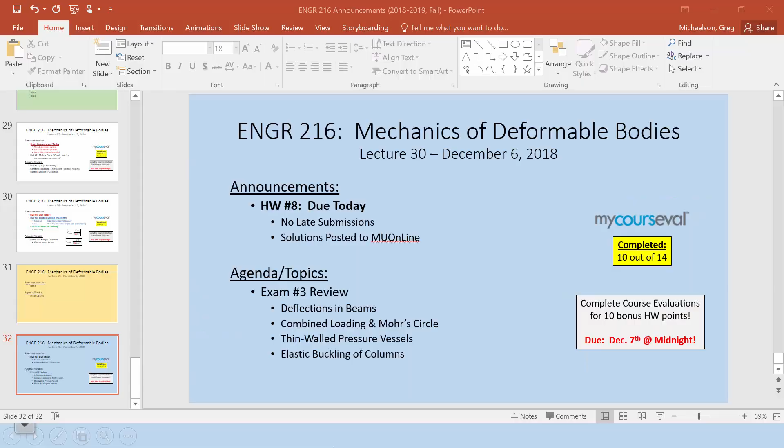The only thing worth mentioning that's a little different about the format of the exam is that instead of there being one set of conceptual questions and 3 problems, there's 4 problems. It's just because there's more topics on this exam.

Bless you. A little bit about the format. So the exam will be closed book, closed notes, calculator, and a formula sheet. You can put whatever you want on the formula sheet except for worked out examples.

I'll say that a straight edge will help with shear and moment diagrams, just a straight edge would help. Also, since we're talking about Mohr's circle, it's probably not the worst idea to mention.

You had the little guide you had? Oh, you don't have it with you? But if you have something that can draw circles, like you can take the top off of that, or something to draw circles, probably not the worst idea in the world. I'm not going to say you have to draw a Mohr's circle, but you may need to.

So just worth mentioning. Now, you know my deal. We're going to try and be on time. We'll start the exam at 8 a.m. sharp, but if everybody that is supposed to be here is here at 8 a.m. or before 8 a.m., we will start early. So it's just on you.

I'll have scratch paper, I'll have staplers. Any of the necessary section properties and any necessary simple deflection formulas will be provided. Unless I make you derive something, then I'm not going to just give you the answer. But again, you know how I go about things.

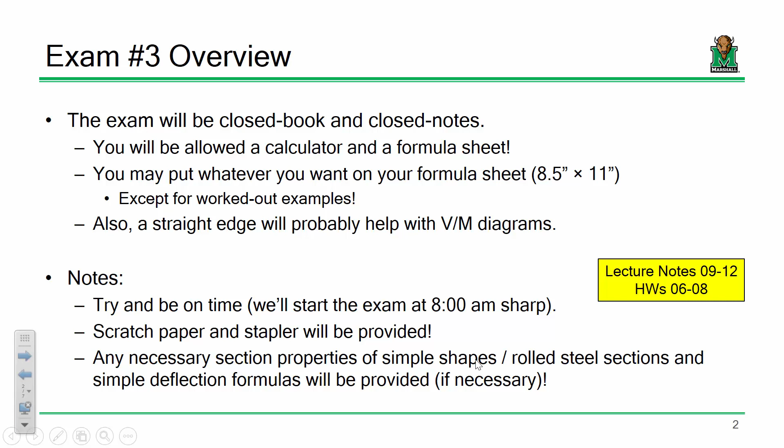Now, as for topics on the exam, we've got deflection. So make sure that you can write moment functions for very simple loading conditions. For those of you that are also in structural analysis, what I'll say is this is not structural analysis. So the moment functions and the analysis that we do in this course is a little easier than what we do in 312. So just worth mentioning.

But you still need to be able to write basic moment functions for simple loading conditions. Make sure that you can integrate it twice, that you can solve for your unknown constants of integration using boundary conditions. If it's fixed, the deflection and the slope equal zero. If it's simply supported, just the deflection equals zero. And make sure that you can determine maximum slopes and deflection.

So, for instance, if you're trying to find maximum deflection, take the derivative, set it equal to zero, solve for x, plug that x into the slope or deflection equation to get your max deflection, and what have you. That's the double integration method. The other method that we used in class was the method of superposition, which is basically using those previously derived formulas. Just as long as you can plug and chug, basically, you're good.

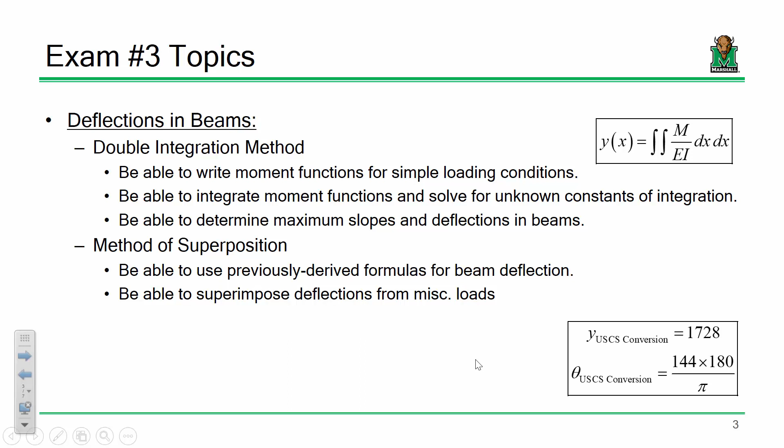The only other thing worth mentioning is your unit conversion for US units. For deflection, based on our unit system, the conversion factor is 1728. For slopes, it's 144 to turn it into radians, but you throw an additional 180 over pi in there to turn it into degrees.

All right, let's talk about stress analysis. First up, based on a given stress state, can you determine another stress state at a different orientation? That's what's in that first box. If you have a given angle theta, you can determine from an x-y coordinate system to a 1-2 coordinate system.

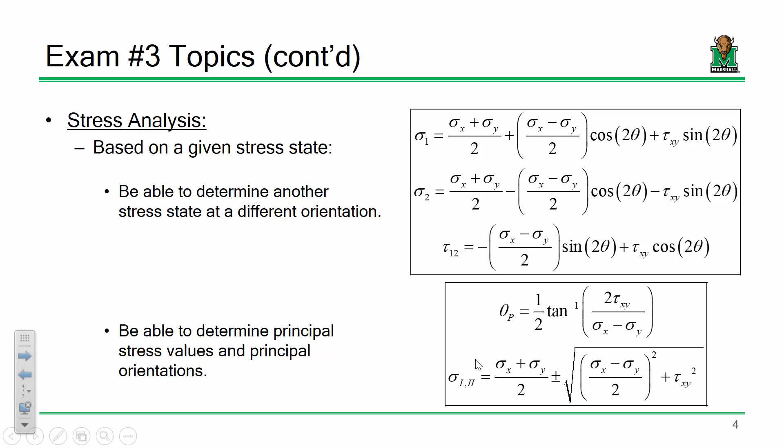Make sure that you can determine principal stresses and principal orientation. Remember, the principal orientation is where there is no shear stress. You can determine your principal angle, theta P, and sigma 1 and 2 with Roman numerals are your principal stresses. Also, when talking about Mohr circle, make sure you can determine the center and the radius. The center is sigma average, and the radius is just what you see here.

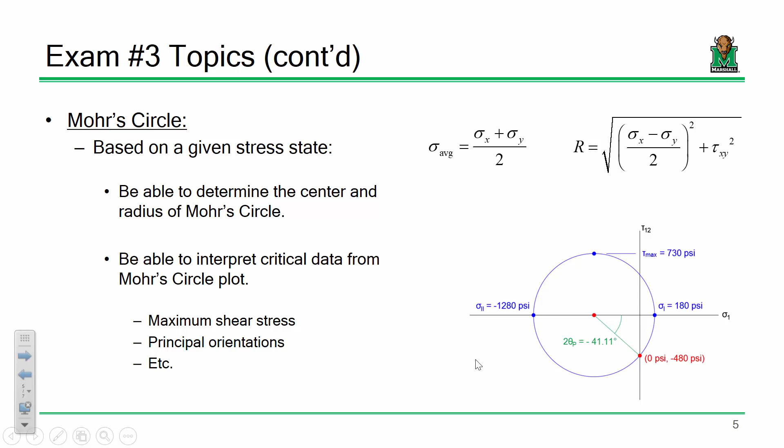I want you to be able to interpret critical data from the plot. What is sigma 1, sigma 2? What is your maximum shear stress? Remember, the maximum shear stress is the radius. So, things like that. And remember your angle is 2 theta, because in the derivation, 2 thetas pop up all over the place.

Combined loading: make sure that you can determine stresses from multiple types of stresses. I think that's a typo there, I meant to say determine stresses from multiple types of loadings. But basically, if you have a bar that's being yanked on, what's the stress? If you have an element that's being twisted, what's the stress? If you have an element that's being bent, what's the stress?

I've said this before, my goal is not to create a comprehensive exam. We've already had a test on axial loads and torsions, I'm not trying to test you on that stuff again. But the nature of this course and these topics means some material bleeds over from one exam to another, so be aware of that. If you have to compute stresses from axial loads or whatnot, it will be simple, not super complicated like it was on exam 1.

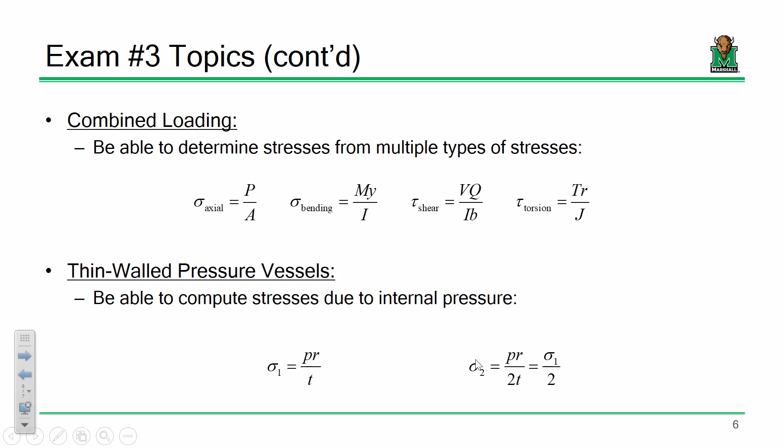Thin-walled pressure vessels: make sure you can determine your stresses due to internal pressure. And elastic buckling: make sure you can determine buckling loads for columns. You've got your K values, determine buckling load, buckling stresses. Make sure you know what a radius of gyration is, the square root of I over A, and what have you.

And that is exam 3, so that's it in a nutshell. With that, I'm going to shut up, or at least shut up when it comes to my lecture, and let you all ask whatever questions you want about exam 3. So take it away, the floor is yours.

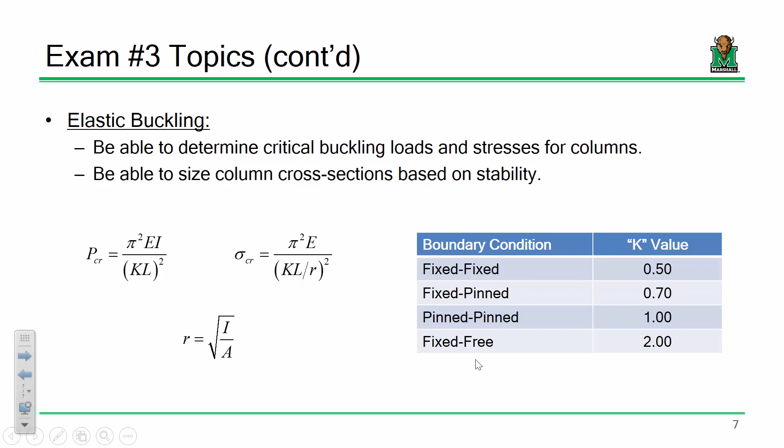Can you do the last problem from homework 7? I don't really remember it. It's a thin wall pressure vessel. Okay, hold on.

Well, first off, I'm happy to do that, but that might take a little bit. Are there any other quicker questions I can answer? Is that something everybody wants to see? Okay, all right, anybody have their book on them?

All right, so we have the radius. We have a radius of 125 millimeters and a thickness of 6.5 millimeters, okay?

So let's see, remind me, does the radius go to the inner diameter or to the outer diameter for a thin wall pressure vessel? We had an example on this, hold on. Oh no, I'm thinking about more for the I-beam, just hold on. Is it the inner? Well, I'm asking you. Everybody's like, is it the inner? No, have someone tell me it's the inner. It's the inner? It's the inner. Okay, all right, remember: the inner.

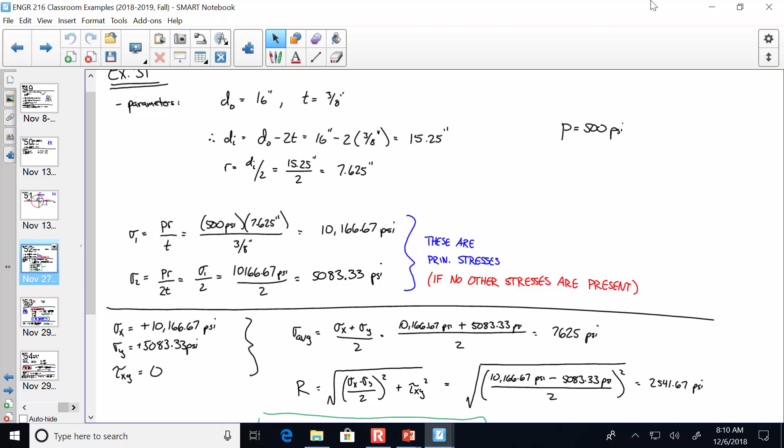So, therefore, the inner diameter is 250 millimeters, and the outer diameter is the inner diameter plus 2 times the thickness, which is what? 263. Do I have a second on that?

All right, so therefore the area of the cylinder is pi over 4 times d-naught squared minus d-inner squared. And so what does that come out to be? Making y'all do some work.

$5237.82. Do I have a second on that? And what are the units? Millimeter squared.

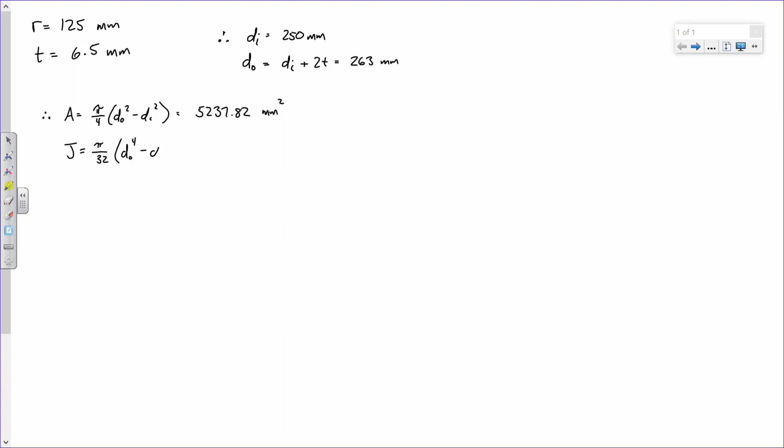Okay, now we've got a torsion on here, so we're going to need a J, right? So what's J? Remember how to compute that? Pi over 32, there we go, times D outer squared minus D inner squared. D naught to the 4th. Oh yeah, I'm looking right at it too.

So what do we got for this? It's going to be big, because you're taking the diameter and raising it to the 4th. It's okay that it's big, let's leave it big. I'll go ahead and tell you why. Does anybody remember if you take a kilonewton and divide it by a millimeter squared, what you get? A gigapascal.

$862 times 10 to the 5th. Say it again, 862 times 10 to the 5th. So 862,000. Oh wait, 862 times 10 to the 5th, millimeters to the 4th? Yeah. Alright, close enough, because I'm not going to worry about decimals and whatnot, we're just doing conceptual stuff here. Okay.

Alright, sound good? So let's handle each load one at a time. Let's take the axial load. Okay, so the axial load, we have a sigma axial, which is P over A.

So that's 5237.82 millimeters squared under what? What's P? 7.25 megapascal- no, that's the internal pressure. What's the problem asking for?

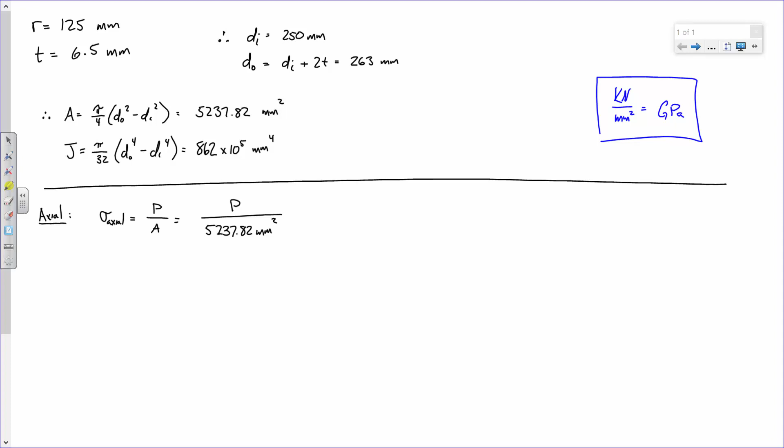So it's asking for P. It's actually asking for P. So P is in doubt, right? Okay. All right. So P is in doubt. All right, so sigma axial is P over 5237.82 millimeters squared. Okay, so that is a formula in and of itself, right?

So is there a part A, part B, or what's the deal? What are we looking, are we doing both parts, or? I mean, just this one is fine. Okay.

All right, torsion. All right, we know that tau due to torsion is TR over J, right? Okay, now are we given a torque? 850 Newton meters. Okay, so we have a torque that's 850 Newton meters.

Does anybody remember how many kilonewton millimeters that is? So, for instance, our torque is 850 Newton meters. How many kilonewton millimeters is that? 850, yeah. So I'm going to take 850, okay, we're going to divide it by J, so 862 times 10 to the 5th millimeters to the 4th.

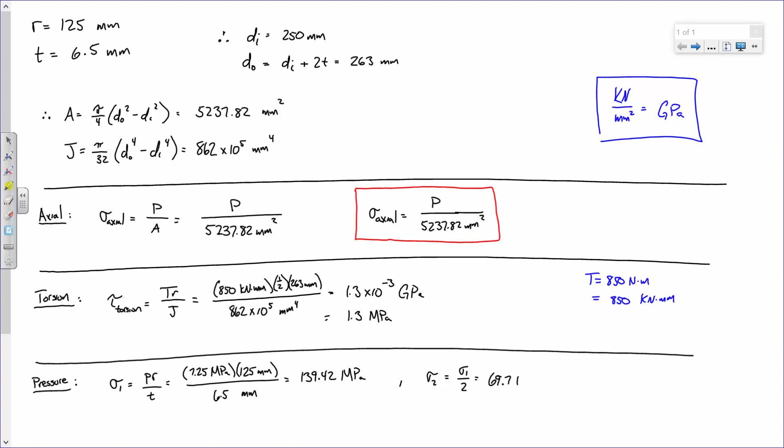$139.42. 139.42 megapascals. And what's sigma 2? It's sigma 1 over 2, which is what? Anybody remember that? 69.7. Okay.

Okay, all right. Now before we go any further, can I see the book? Solve for P such that what? For what- allowable stress. The allowable tensile stress in the wall of the cylinder is 160 megapascals. Okay. All right, that's going to be the hard one, actually. So, okay.

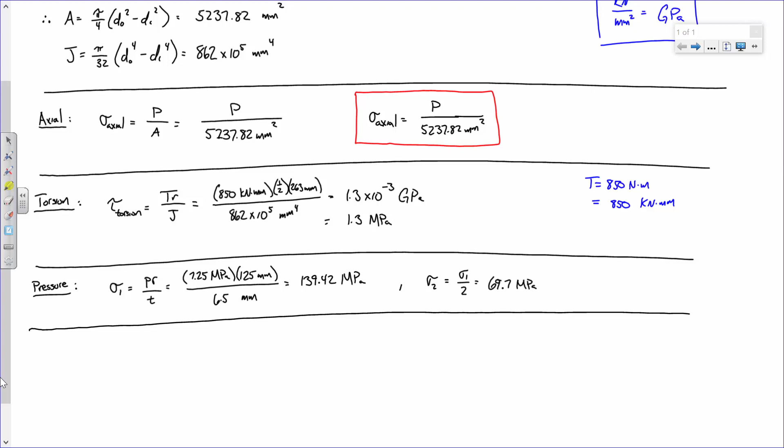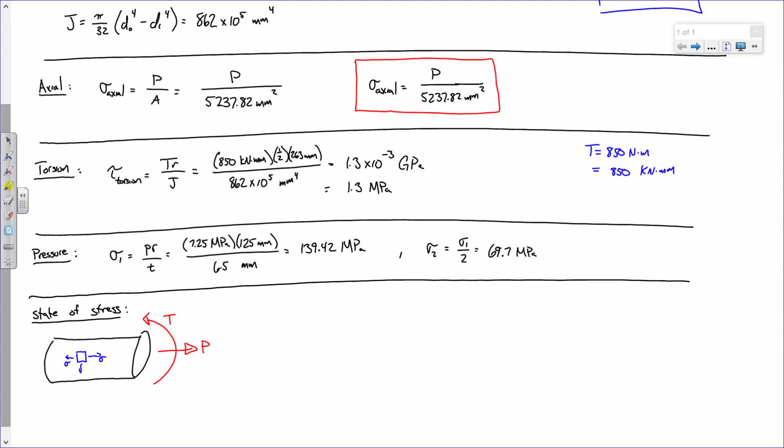Okay, so we need to look at our state of stress on this problem. Okay, so here's the vessel, right? And the vessel is being yanked on by some load P, being twisted on by some torque T, and it's seeing some internal pressure, right? Now remember, if you have a stress block inside the pressure vessel like that, we have stress going this way and stress going this way, right? Remember that? All right, and then here I'm going to pull up my lecture notes because I want to show you something.

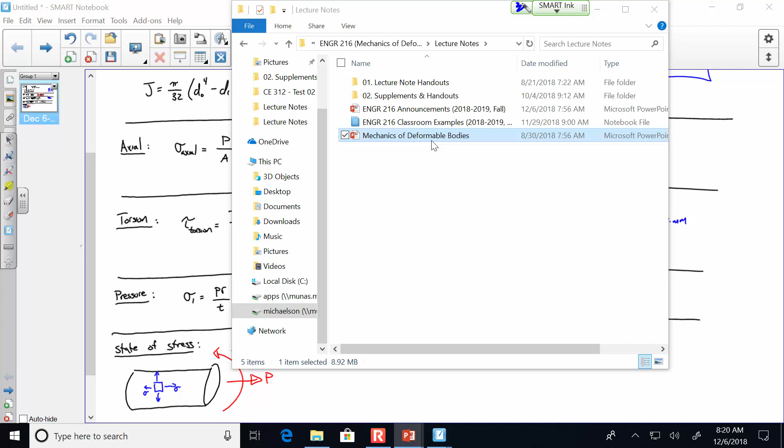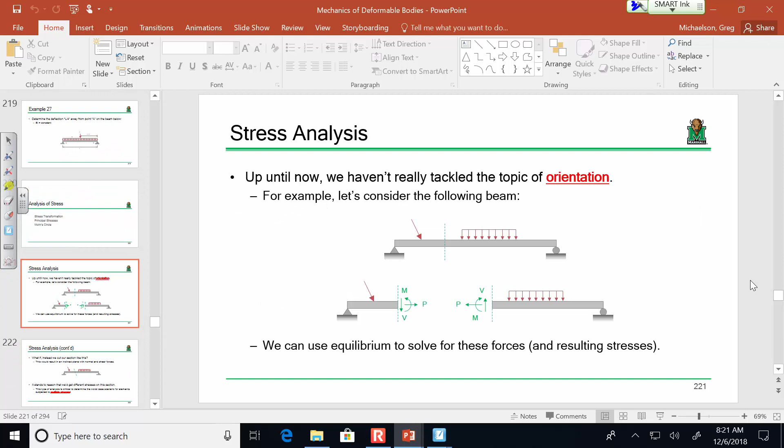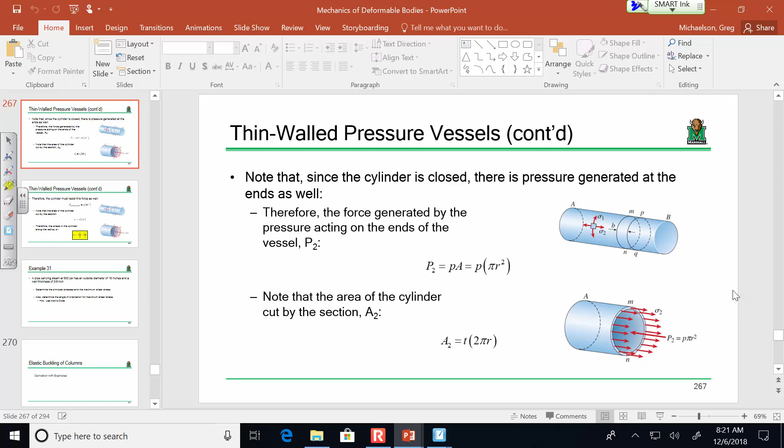Find it, hold on. Remember, here's your stress block, right? And so sigma 1 goes this way, sigma 2 goes this way, right? Okay. All right, so this is sigma 1, and that's sigma 2, and that's sigma 2. Is everybody okay with that?

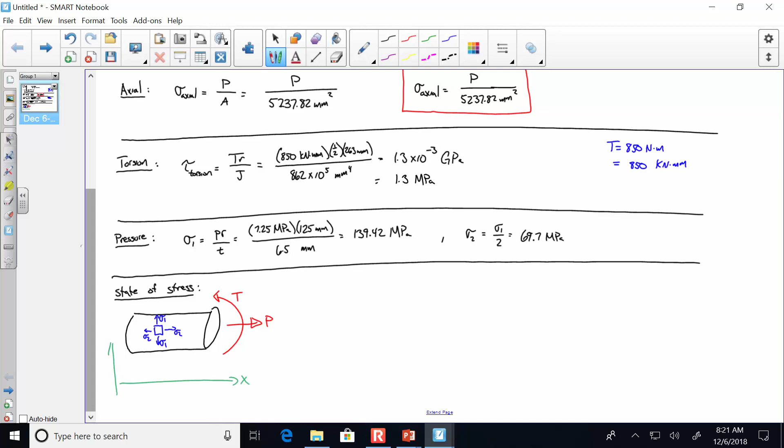All right, so for this given problem, if we want to keep this simple, we'll say this is the x-axis, this is the y-axis, okay? I propose that sigma x is going to be sigma 2 plus sigma axial, okay? Let me digest that a little bit. So the stress that's going this way is whatever sigma 2 is, plus whatever the sigma due to the axial load is. Is everybody okay with that?

So that's going to be, all right, that's going to be, what is that, 69.7 plus P over 5237.82 millimeters squared, right?

Everybody okay with that? Sigma y is going to be sigma 1, which is 139.42, right? Actually, wait, I just realized something. This is why you don't go too far.

That's going to be in newtons, right? Because if a kilonewton over a millimeter squared is a gigapascal, a newton over a millimeter squared is a megapascal. So whatever value of P that we get is going to be in newtons.

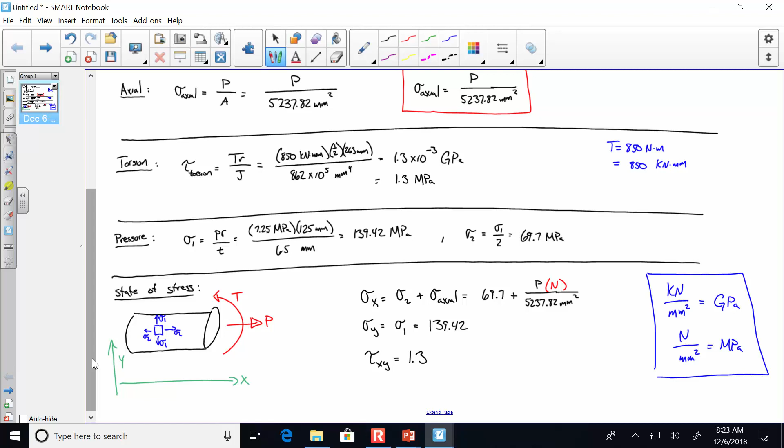So, does everybody have this so far? Actually, wait, I'm not going on to another panel. I'm just gonna do that. All right, so...

So let's see, we have sigma x is 69.7 plus sigma axial. We have sigma y is 139.42. We have tau xy is 1.3. Is everybody okay with that?

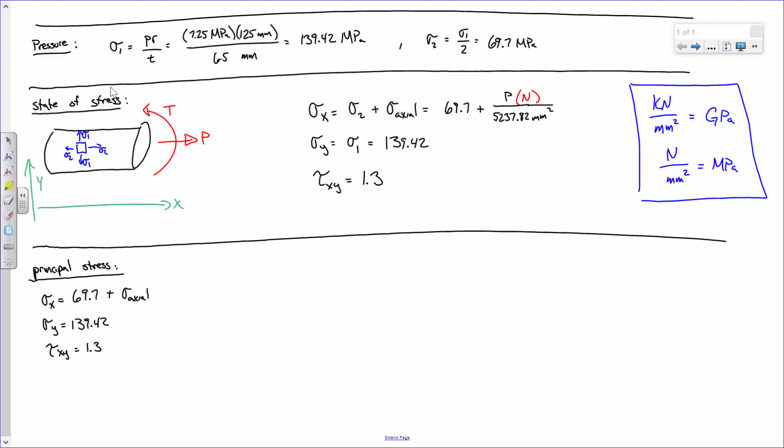Now remember, principal stresses, we have a sigma capital 1 and a sigma capital 2, right? So what is the formula for sigma capital 1? It's this right here, right? Here, let me...

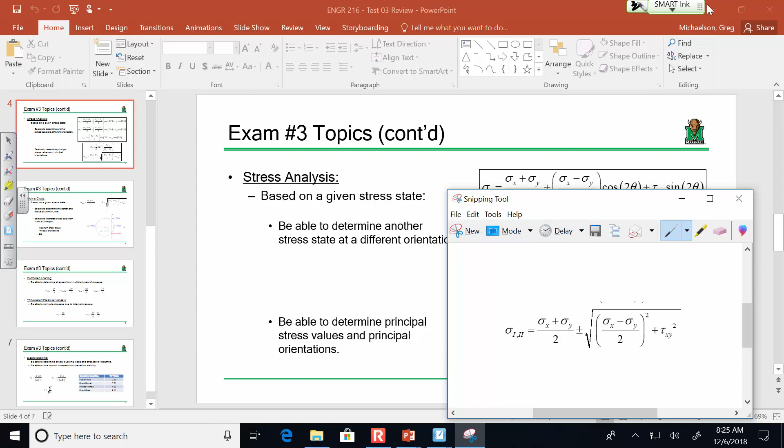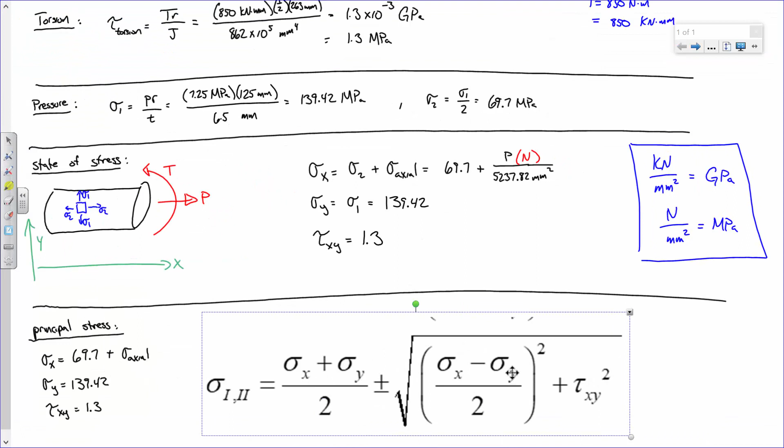Here are our formulas for our principal stresses, right? Y'all remember that? So remember, you have a state of stress, you're trying to rotate it to determine a worst case scenario. So which one is bigger? Do y'all remember? Which one do we traditionally take to be bigger, sigma 1 or sigma 2? Sigma 1, right? Because sigma 1 is this plus this quantity, sigma 2 is this minus that quantity, right?

So our sigma 1 is sigma x plus sigma y over 2 plus that. So if you didn't like this problem, really the reason you didn't like this problem is algebra, okay.

That's probably why. Okay, so what do we have here? We have 69.7 plus sigma axial plus 139.42 over 2 plus, then over here, we have 69.7 plus sigma axial minus 139.42 over 2 plus 1.3 squared.

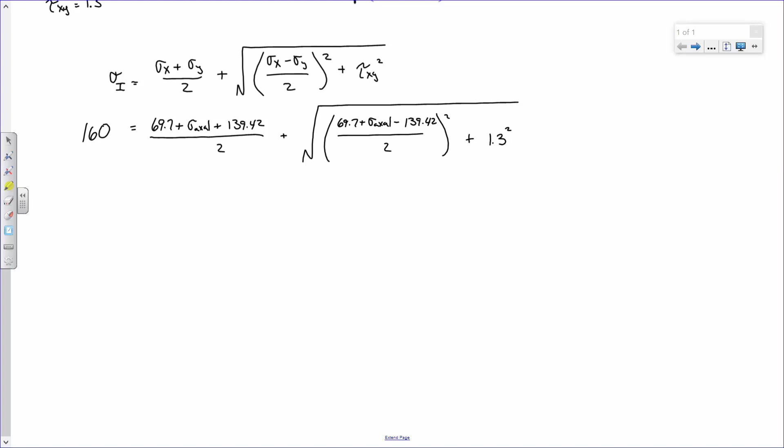Okay, now let's do a little bit of algebra, and then I actually want to show you something. It's really more for you mechanical engineers in the room. So 160 equals, now help me out over here, what's 69.7 plus 139.42?

Okay, and then divide that by 2. 104.56. Is everybody okay with that? Okay, and then over here, we have, let's see what we got here. What is sigma axial? Okay, so we have sigma axial.

Okay, so what is 69.7 minus 139.42? Minus 69.72. Okay, and then what we'll do is we'll say that quantity squared, and then that's over 4 plus, and then this is, I think, 1.69. Did I do that right?

Okay, now there's a couple of ways of going about this problem. If the algebra scares you, we can get to this point right here and actually use goal seek, but we'll do that later.

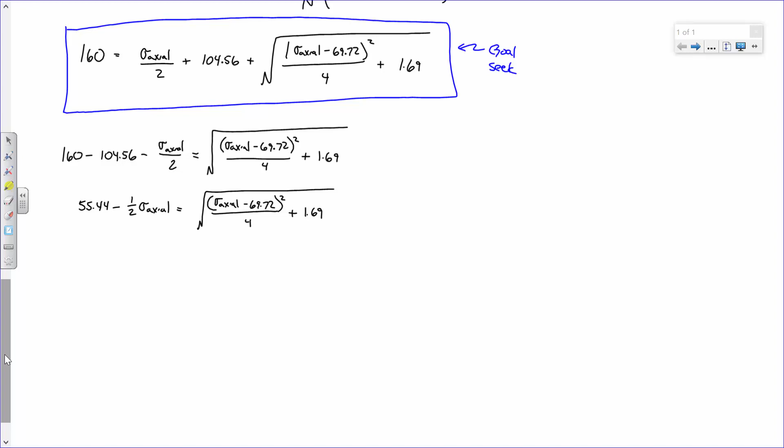So what I can do is I can square this whole thing over here on the left and square this whole thing on the right. If I square everything on the right, everything, the square root cancels and I have sigma axial minus 69.72 squared over 4 plus 1.69. And then that equals what we have here on the left.

We have 55.44 minus 1/2 sigma axial squared. Sound good? Break out a little bit of that foiling, right?

Now we got to do some foiling. So first times first, so I'm going to need some help. What's 55.44 squared? 3,073.6.

Minus, and then we'll have 2 times 1/2 times 55.44 sigma axial, plus 1/4 sigma axial squared. Let me know, am I losing anybody? Let me know, or is everybody okay with this?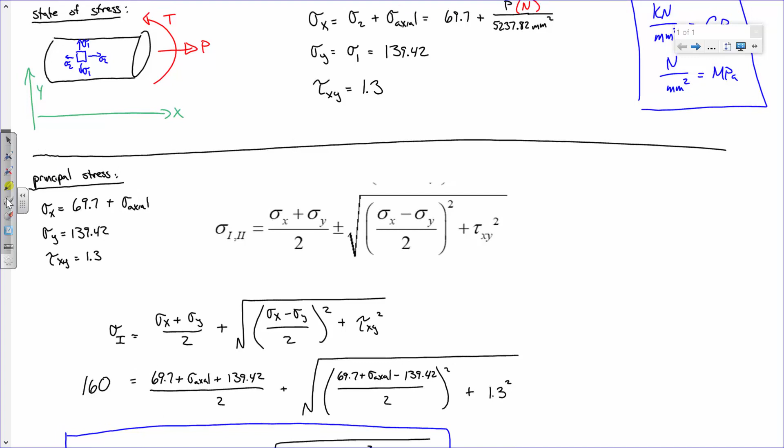.22. And that's megapascals. Now remember that also equals P over 5237.

Right? So what's P? 472,544, and that's newtons, which is 472 kilonewtons. Now the book got 460. My guess is there's a rounding error in there somewhere, so don't quote me on the rounding.

So it was algebra. There you go. Thank you. What do you think? Any questions?

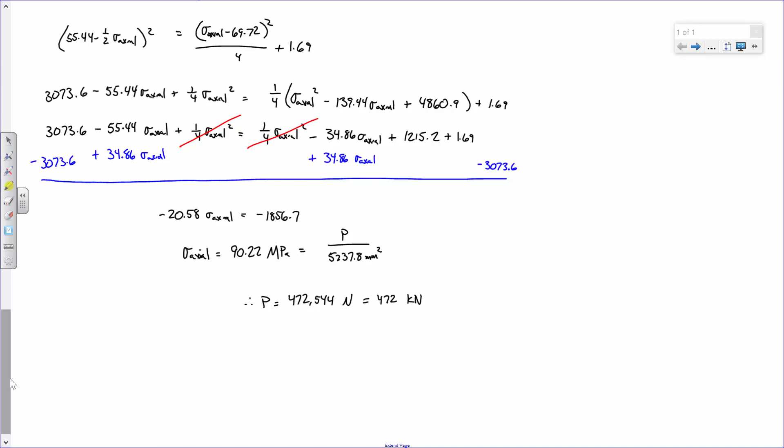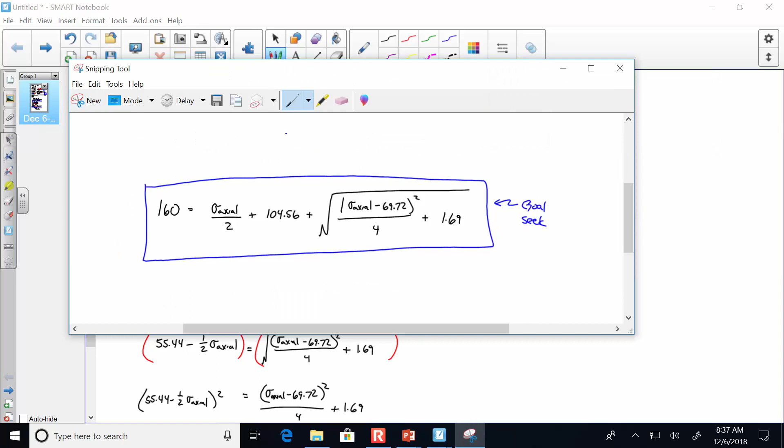Now, I do want to show you, mechanical engineer, something because I think you need to see it. See this equation right here? All right, let me show you something. I don't think maybe you mechanical engineers use Excel now. Maybe you civils need to see it too.

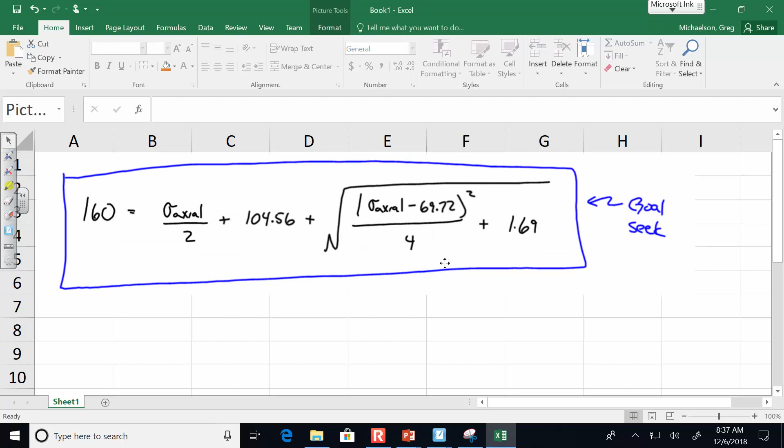All right, so we're going to put a sigma axial term. What was the answer for sigma axial? Does anybody remember?

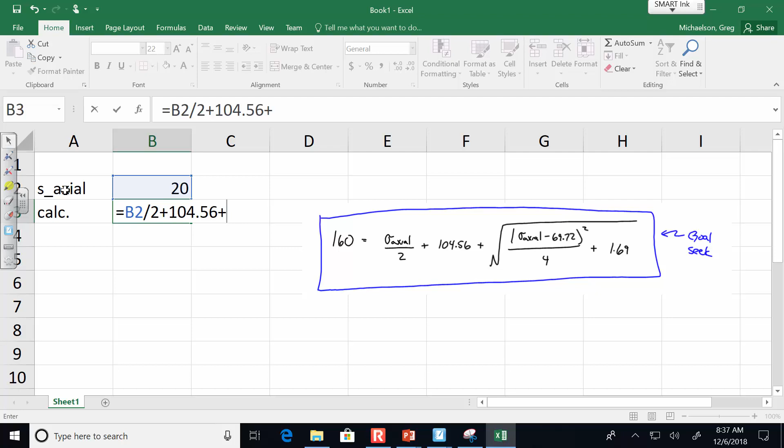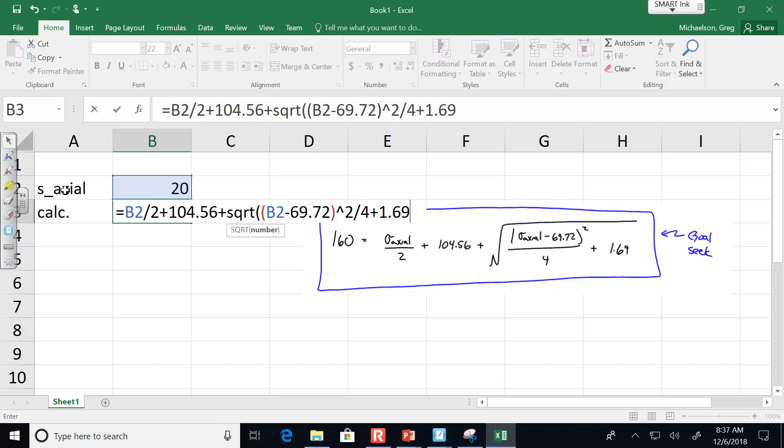90.22, okay? I'm just going to make a guess. Let's say it's 20. All right, what I'm going to do is calculate what's on the right. So that divided by 2 plus 104.56 plus that, right?

So think, no, what was the answer? For sigma axial? 90.22. So if I put in 90.22, what do I get?

I get like 160. So, but let's say you didn't know that, let's say you put 20. So what I can do is take the difference of that and whatever's on the left side of the equation, which is 160, right? So see this cell here? See what happens the closer I get to, watch this, 40, 50, 60, and then 90. See how it gets closer to 0?

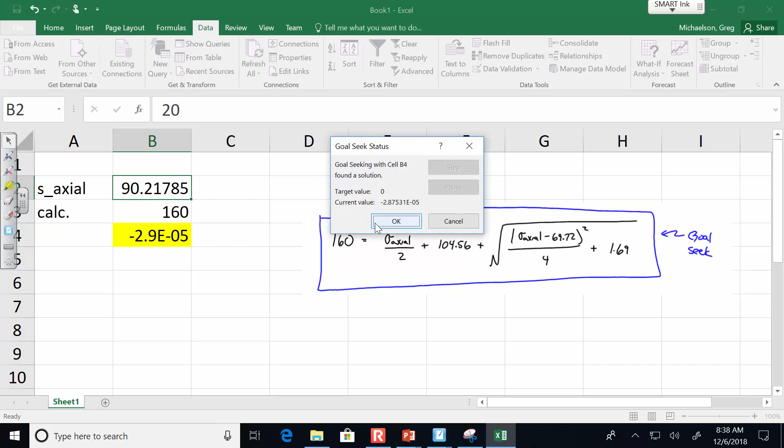So what I can do is just put in a guess, and I can say data, where is it, what-if analysis, goal seek, set that equal to 0 by changing whatever sigma axial is, and boom, there's the answer. Excel is awesome.

If you're on a desert island and they ask you what you need, you don't need, like, the White Album from the Beatles, or a pocket knife, or a signal flare. You need Excel.

Goal seek is awesome, that's all I'll say. Have you mechanicals done that before? In your class? No, I'm talking elsewhere. No. We teach you these tools for a reason. Seriously, it's a very valuable tool. I know you can't use it on an exam, but it'd have made your homework a lot easier.

One other thing worth mentioning, the algebra on the exam is not that intense, I'll go ahead and tell you. That's Thursday. That's what I have on my calendar, Thursday at 8, right? Yes, no, 13.

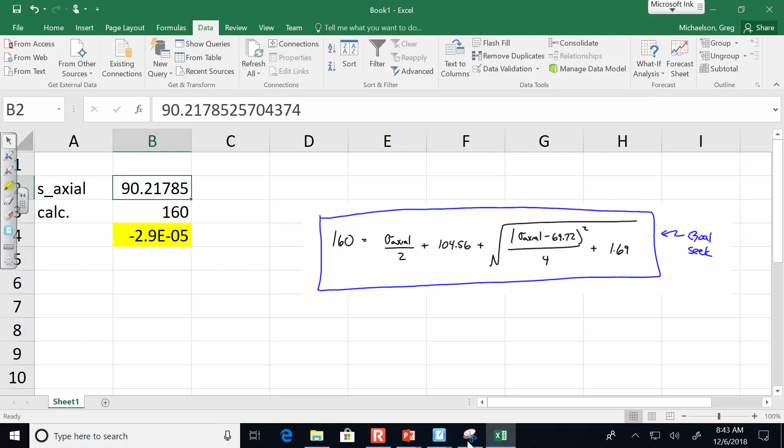Now, instead of L, what if it's 20? At x equals 20, or at x equals 0. If you have a pinned end, you're going to have x equals 0 and x equals L, both just y equals 0. And that's really it. Now, if I wanted to be a big jerk—which I'm not going to be—instead of a hinge, pin, or fixed support, I could put a spring on the end and say the deflection is K times X or something. But I'm not that mean. So on most days I won't be that mean on Thursday. I don't think.